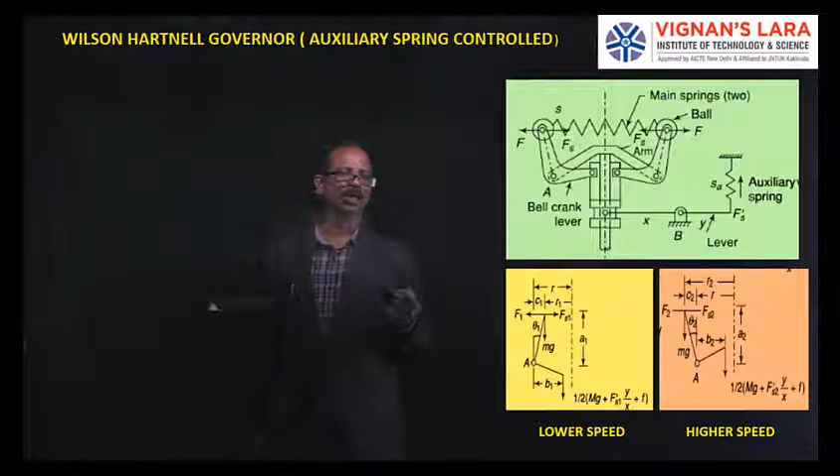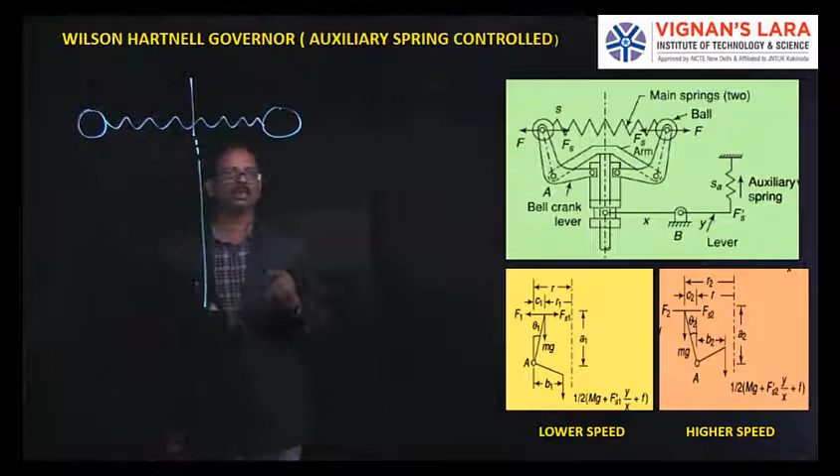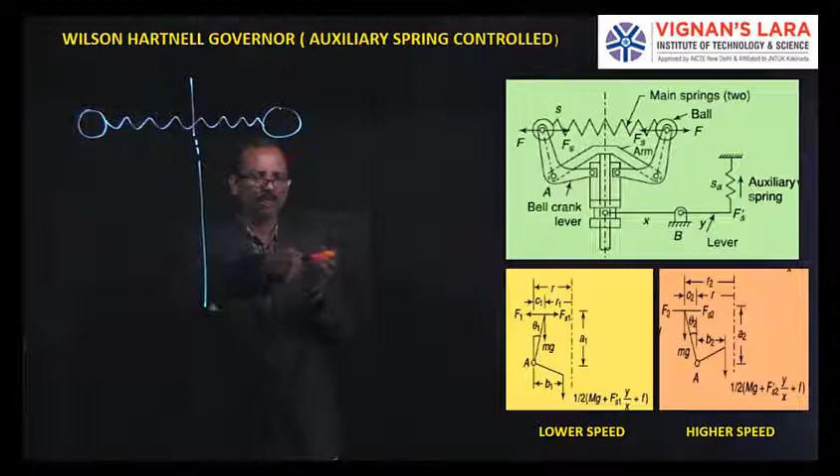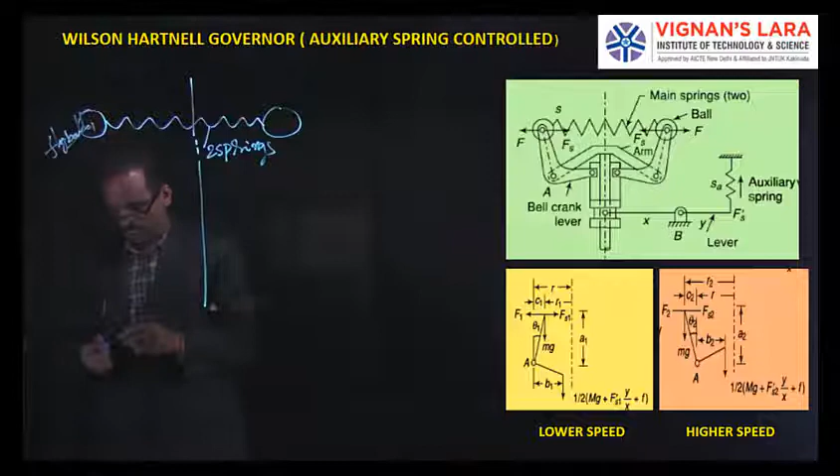I'll draw a simple line diagram, though the complete diagram is already available. The fly balls, fly ball 1 and fly ball 2, are placed such that they are connected by two springs, meaning they are kept parallel. You can imagine spring 1 and spring 2 connected at this end and this end. These are the two springs, placed here. This is fly ball 1 and this is fly ball 2.

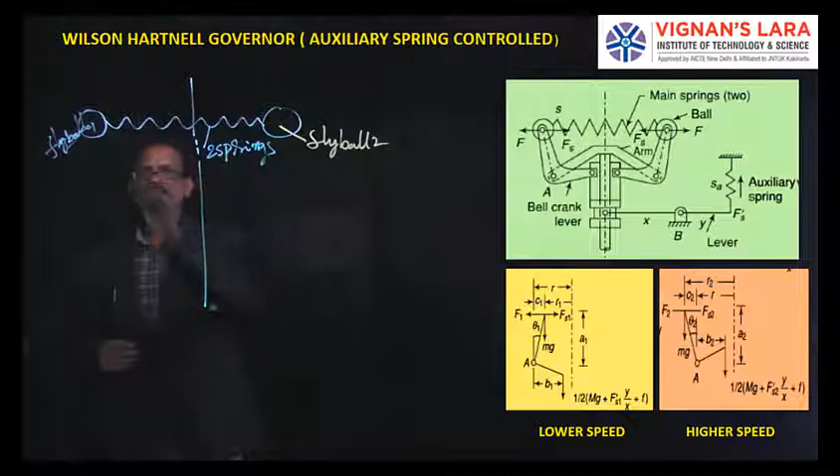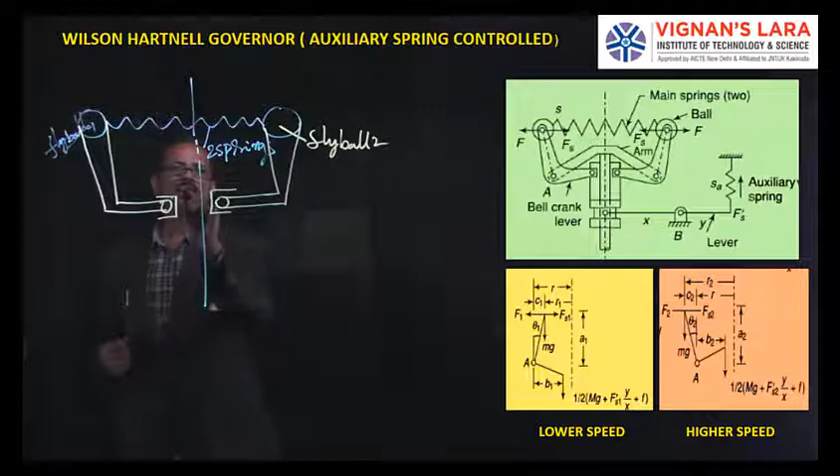These fly balls are connected to bell crank levers as usual, with horizontal and vertical arms. The bell crank levers are connected like this, and of course there's your sleeve and a main spindle. These bell crank levers are pivoted at points A and B, and the entire sleeve is connected like this. This is a simple line diagram.

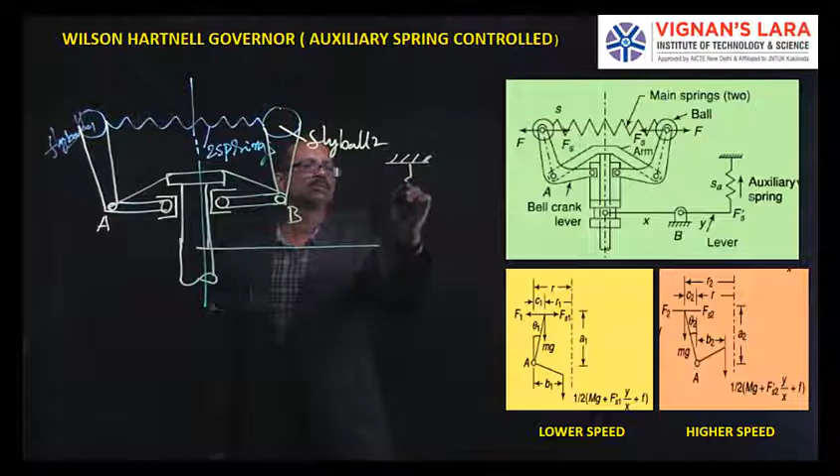In addition to this, you can observe one more spring connected, called the auxiliary spring. We keep a fulcrum point at one location, and this is called the auxiliary spring.

Now if you draw the free body diagram, the two extreme positions are shown separately, lower speed and higher speed. Let's see the forces we get here. The spring here has a spring stiffness of SA, and the main spring stiffness is S. S is the main spring and SA is the auxiliary spring. We define these distances as X and Y: X from the fulcrum point, and this is Y.

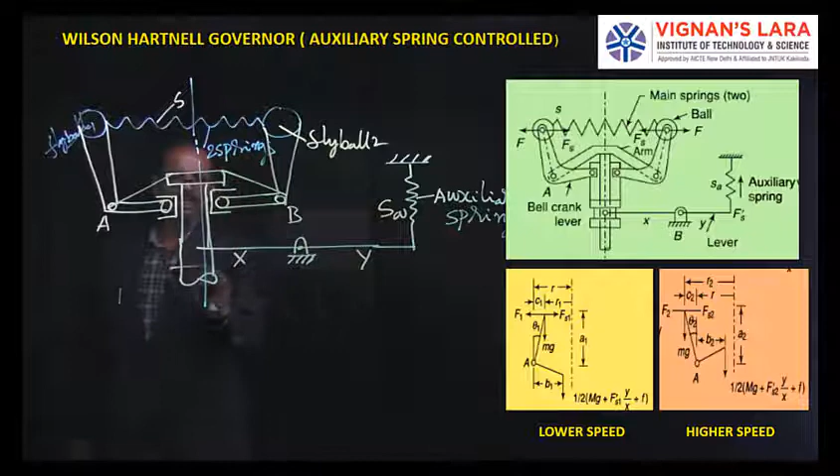When the main spindle speed increases, the fly balls move outward like this, and the fulcrum causes the lift of the sleeve like this. Similarly, if the speed is reduced, it simply pushes back.

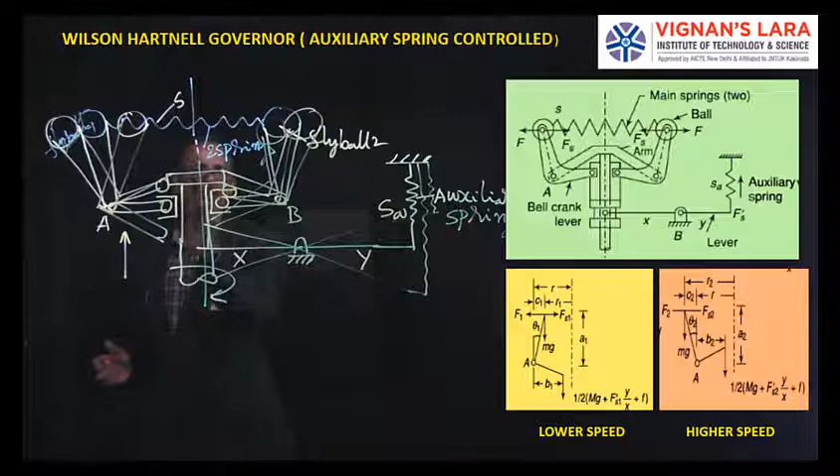This lift causes the auxiliary spring to also lift, moving like this. So the lift of the spindle causes the balls to move outward. When the balls move outward, the entire sleeve moves up. When the sleeve moves up, this causes the auxiliary spring to move downward. This is the high speed state.

In reverse, when it is dropping down, it moves down, so this spring is compressed. This part is the low speed category. So one is the high speed category and another is the low speed category.

We will see the force analysis, how the forces are affecting things, with the diagrams available separately. So this is the main working: there are two springs connected parallel, one behind the other, these are the fly balls, and there's a separate auxiliary spring pivoted here, connected to the main spindle through another lever, pivoted at a point here. When the sleeve moves up, the fulcrum point causes the auxiliary spring to move down, and when it moves down, the auxiliary spring is compressed.

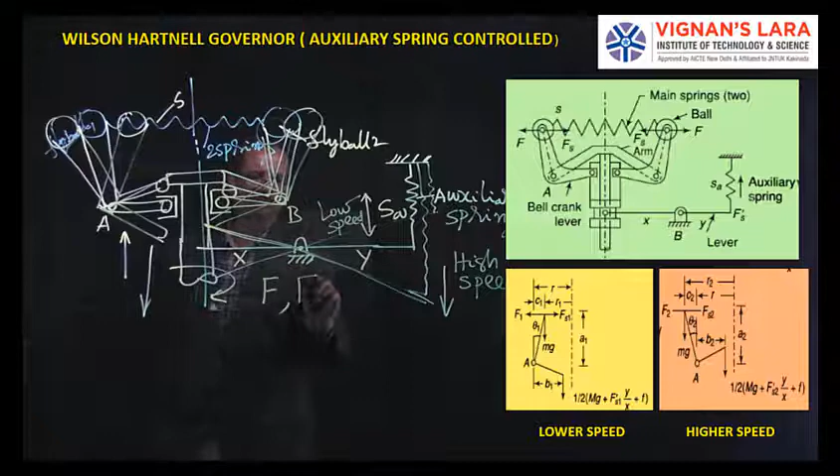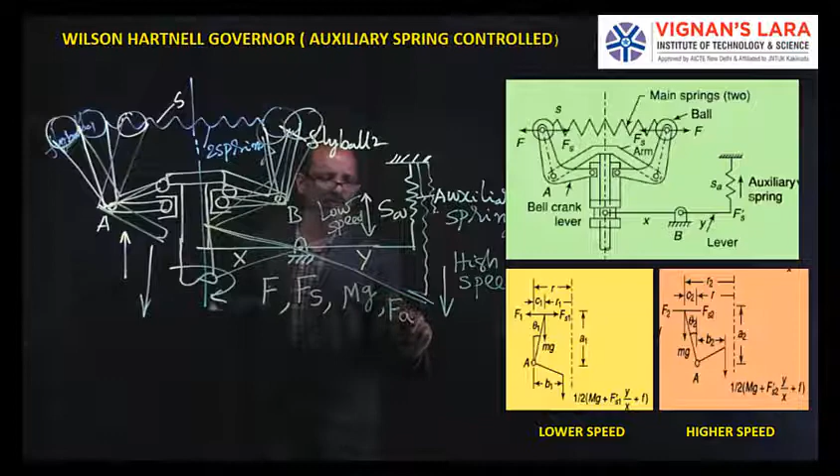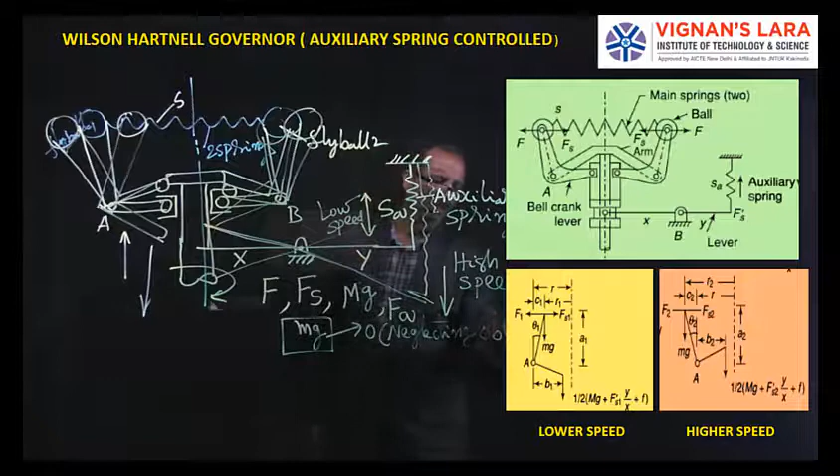If you look at the free body diagrams, what forces do you get? There are four forces: one is centrifugal force F, another is spring force Fs, another is sleeve weight Mg, and another is auxiliary spring force Fa. Even Mg, the self weight of the sleeve, we neglect and take as 0, because we are neglecting the obliquity effect of the arm.

That means neglecting the obliquity effect of the arm. Neglecting obliquity indicates A1 is equal to A2 is equal to A, B1 is equal to B2 is equal to B, and C1 is equal to C2 is equal to 0.

These terminologies are familiar to us from the fundamental basic governors, spring controlled ones, Hartnell governor onwards: A1, A2, B1, B2, C1, C2. So when I consider C1, C2 is equal to 0, automatically this mg component moment becomes 0.

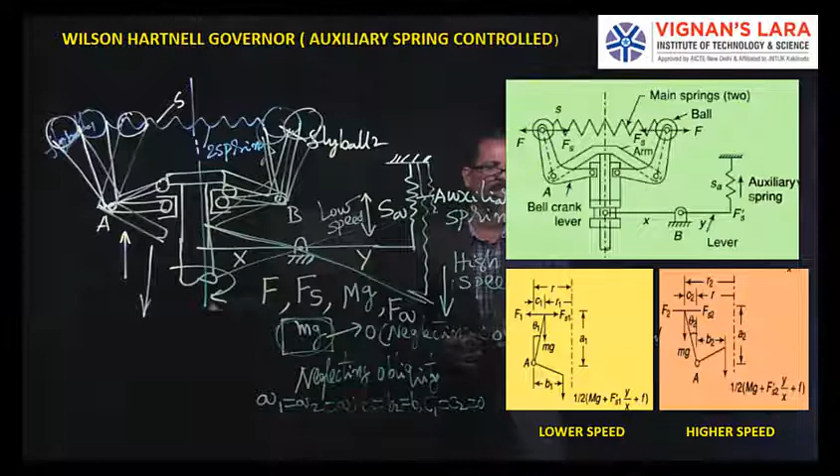So let us see the free body diagram analysis, and with that analysis we will solve a problem on the Wilson-Hartnell type governor.

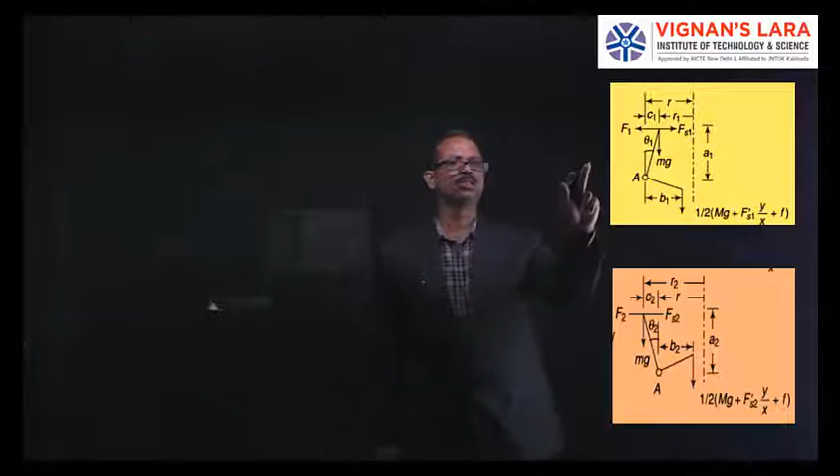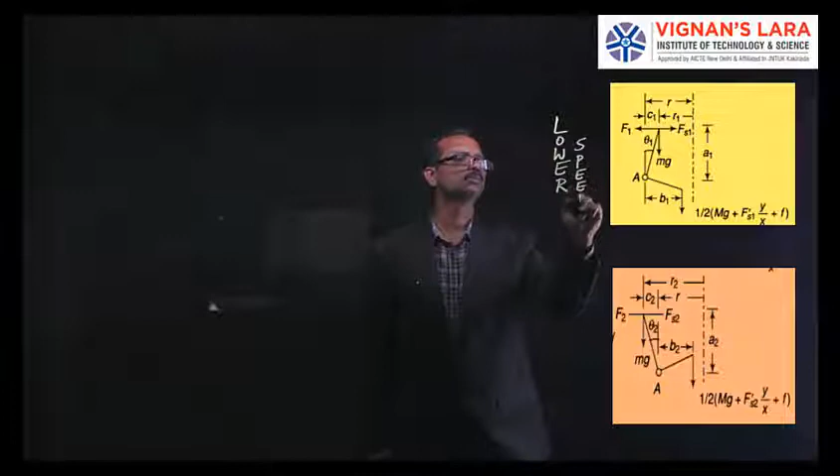On the Wilson-Hartnell type, on the right side I have shown the two positions of the force analysis at lower speed and higher speed. The first one, shown in yellow color, is lower speed, and the second one is higher speed. The various forces that act are shown.

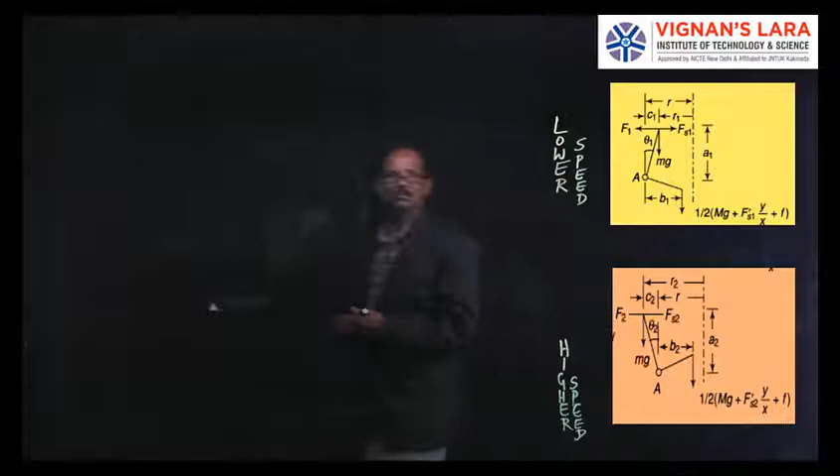I have also shown the entire forces and terminology without neglecting the obliquity effect of the arms. Let us see here C1, C2, A1, A2. So the two speeds corresponding to lower speed and higher speed, and its free body diagrams are available.

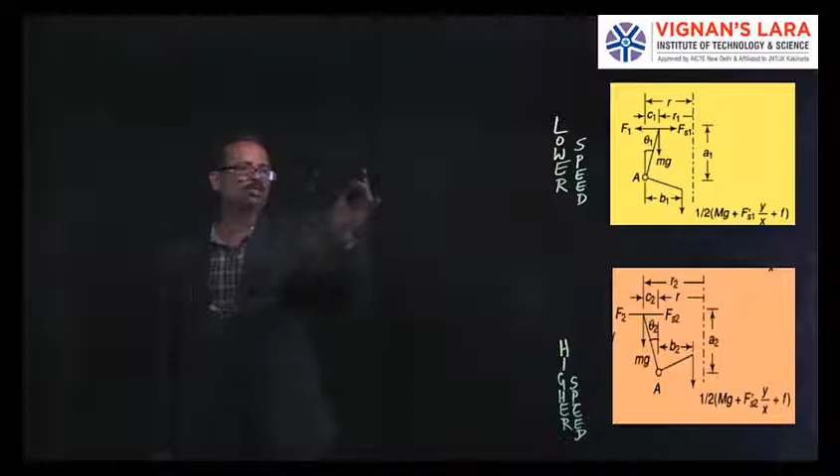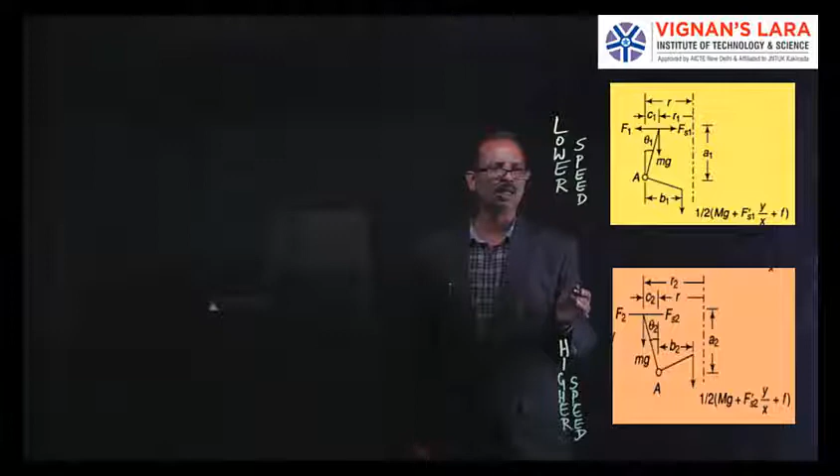The forces are like spring force main and spring force auxiliary. For the first one, lower speed, and the other one, higher speed: main spring force Fs1 and auxiliary one is called Fsa1, like Fs2, Fsa2. So these are the forces coming on the governor.

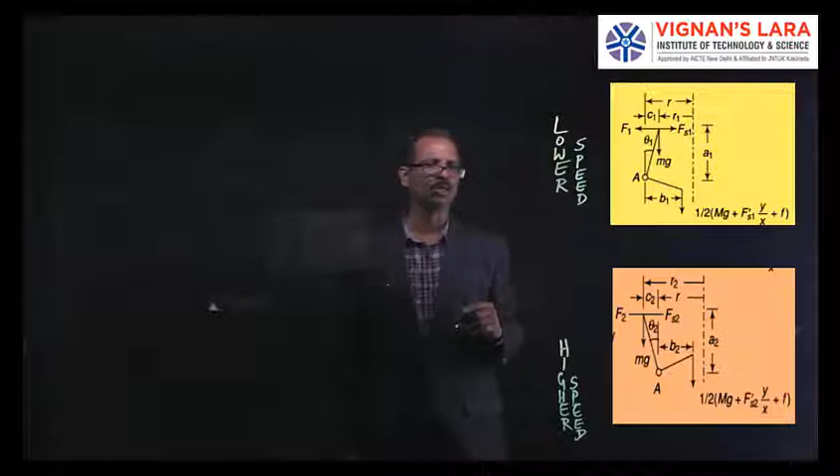Here we have written C1, C2, that is by considering obliquity, but finally I will consider neglecting obliquity, that is C1 is equal to C2 is equal to 0. I have written here the friction component also F, but if I neglect F, I will simply be having four forces.

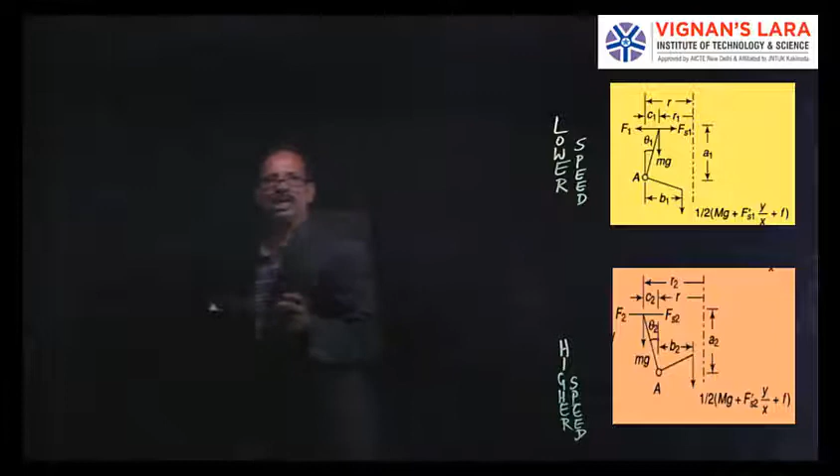The forces I have are F, Fs, Fsa, and Mg. These are the four forces.

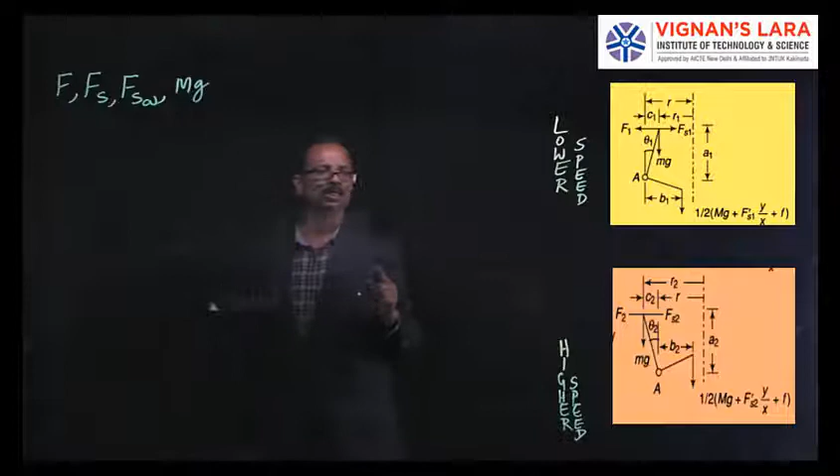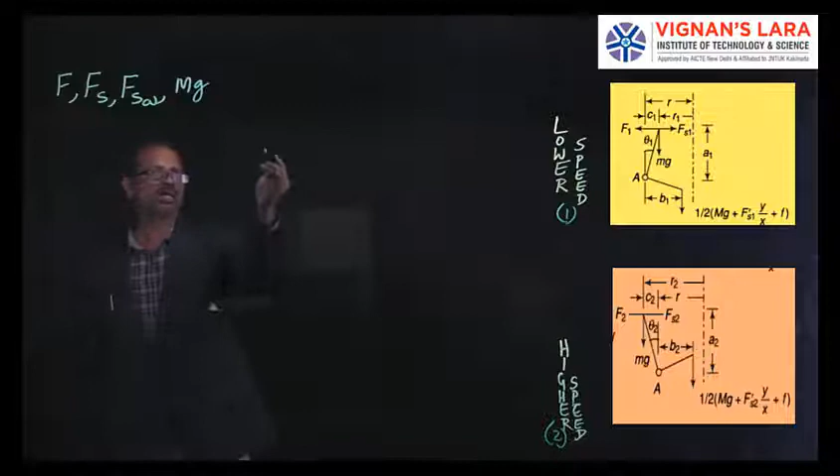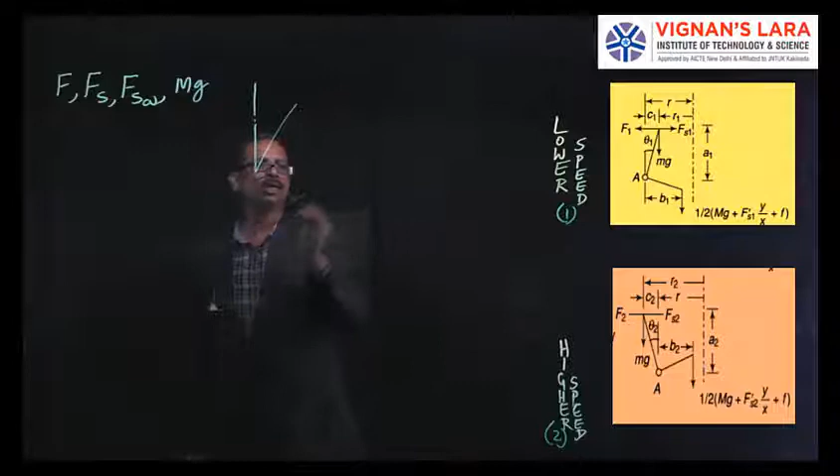If I put 1, it stands for lower speed. If I put 2, it stands for higher speed. So let us first consider at lower speed. What is the lower speed, F1? At lower speed, this will be moving inside and this will be moving down.

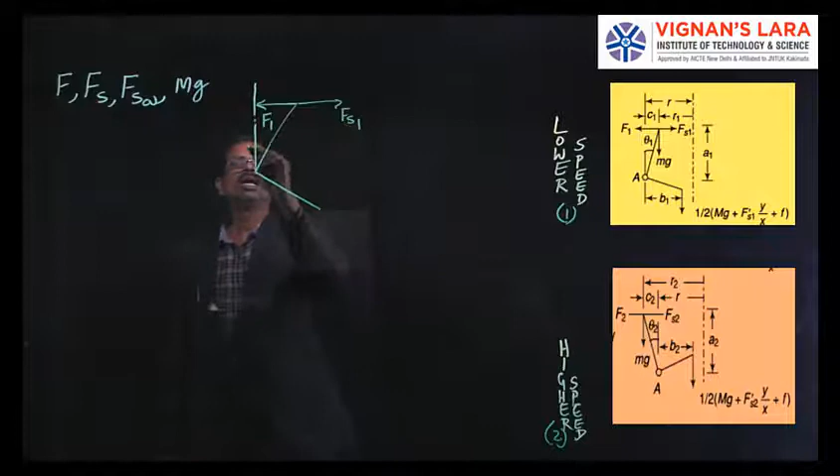So here this is F1, Fs1, and this is A, this is also taken as A, and this is B, this is also taken as B. That is neglecting the obliquity.

And what about here? This is half mg, so half will be shared on the left and half will be shared on the right, that is the self weight. In addition to this, what is the other component you get? That is the auxiliary spring force, the main spring force, and the auxiliary spring force.

So this spring force will not come as a total component; it will be shared by y by x. What is this y by x? I will tell you. This is the radius of rotation, R1.

So Fsa into y by x is: the spring force, auxiliary spring force, which acts here, this is the spring force auxiliary. As I stated, there is a fulcrum point which we defined, this is x, this is y, and the actual load that is coming on the bell crank lever is here like this.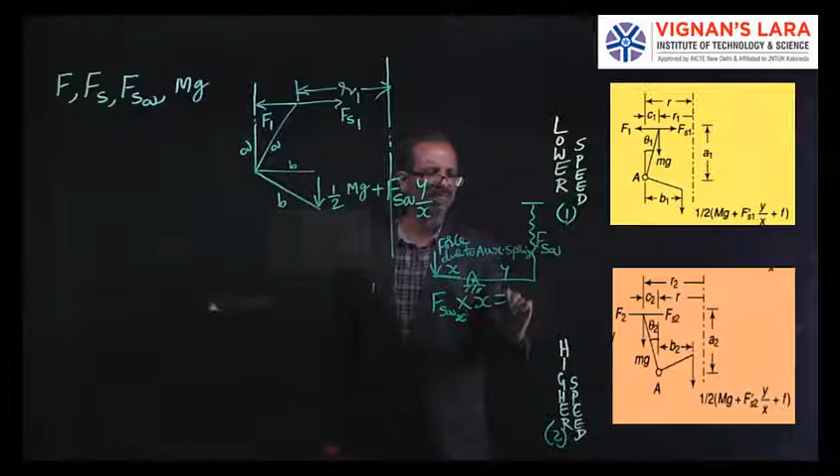At x I will put it like say I can call F suffix sa into x, this is equal to Fsa into y. So I have taken moments here: this force into x is equal to this force into y.

So actual my force is this. This force is nothing but Fsa x is equal to Fsa y by x. That is what it is: half mg plus Fsa into y by x, due to auxiliary spring force component which comes here. Then let me write the moment equations taking moments at this point A. So this is F1.

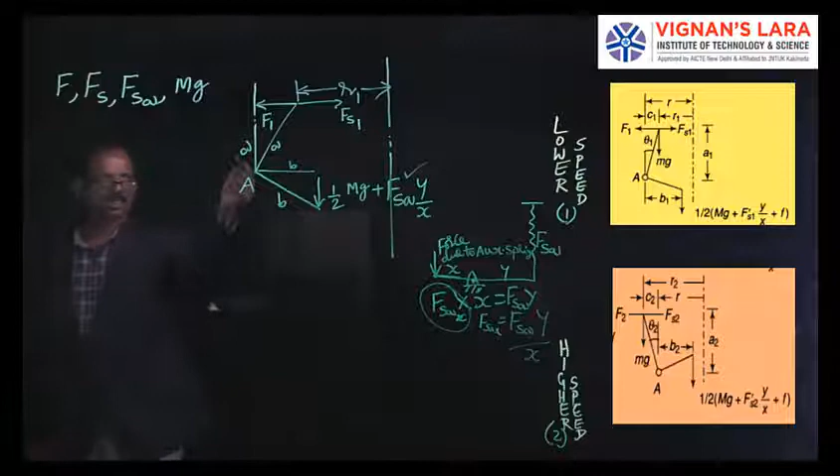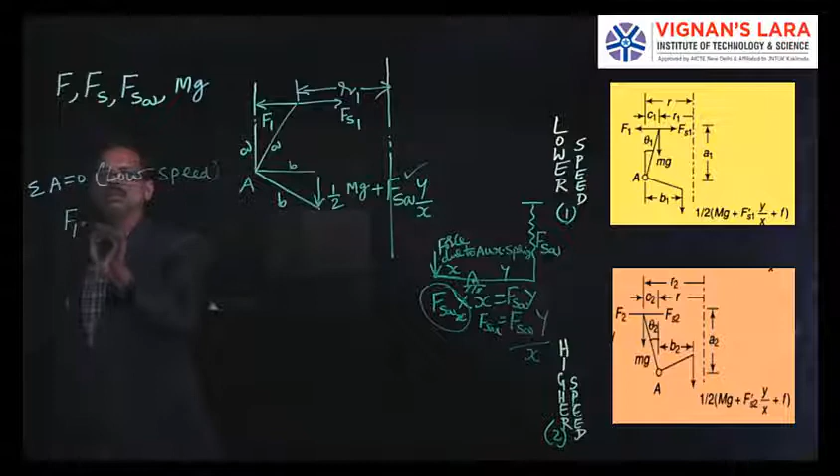I have not taken into consideration the friction force. So half into mg plus Fsa, into y by x, perpendicular distance of B1 is equal to 0. So F1A1 minus Fs1A1 minus half mg Fsa into y by x into B1 is equal to 0.

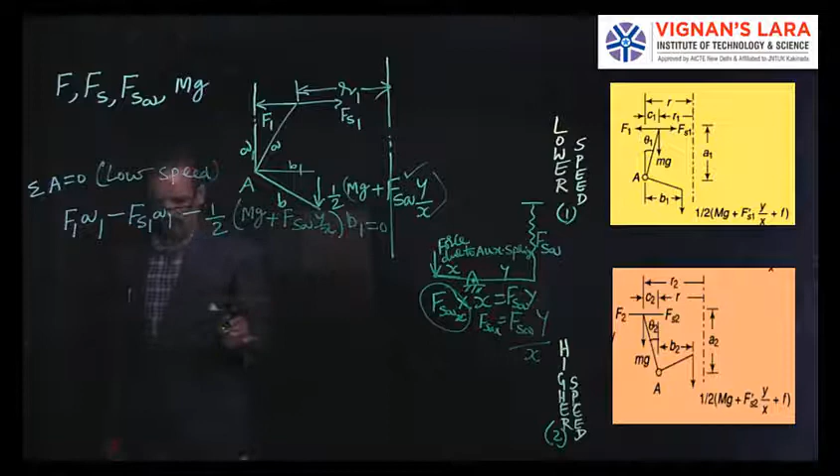So this is auxiliary force at state 1. I can call this SA1. So 1 stands for low speeds, 1 stands for low speeds.

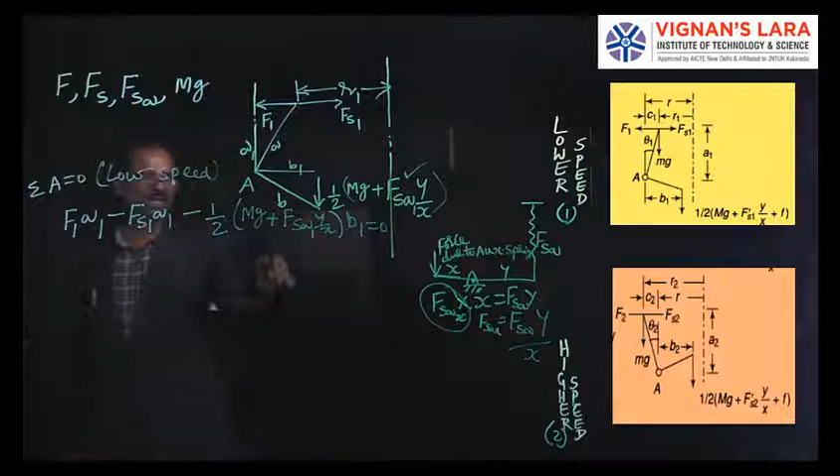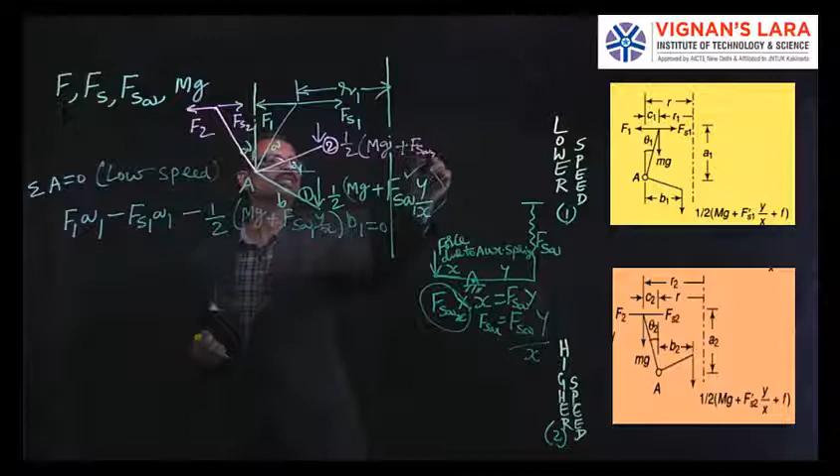Similarly, if I write the other part, that is for condition 2. Condition 2 means like this. This is condition 2 and this is condition 1. So if I write for 2, then it will be F2, then Fs2, then here half into Mg plus FSA2 y by x.

So if I write this equation, F2A2 minus FS2A2 minus half Mg FSA2 y by x into B2 is equal to 0. Let me call these equations 1 and 2.

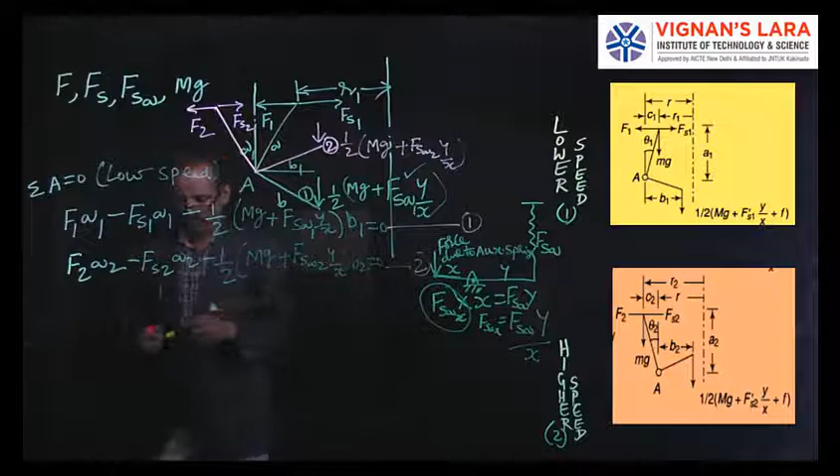So neglect obliquity of arms. If you neglect obliquity of the arms, A1 is equal to A2 is equal to A, B1 is equal to B2 is equal to B.

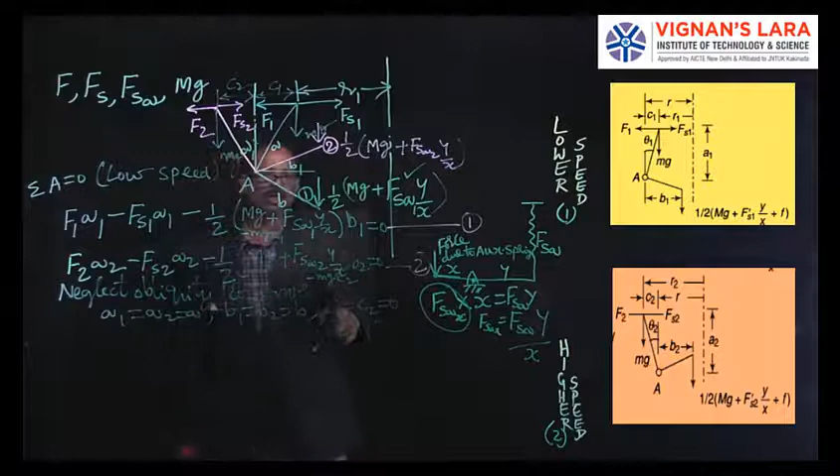Of course, C1 is equal to C2 is equal to 0. So actually, if I want to write the mg component, that I have already neglected, I can consider here, this is mg, C2, C1. So that means I will consider that component also here, minus mg C1 and here minus mg C2. Anyhow C1 and C2 are 0, these components will become automatically 0.

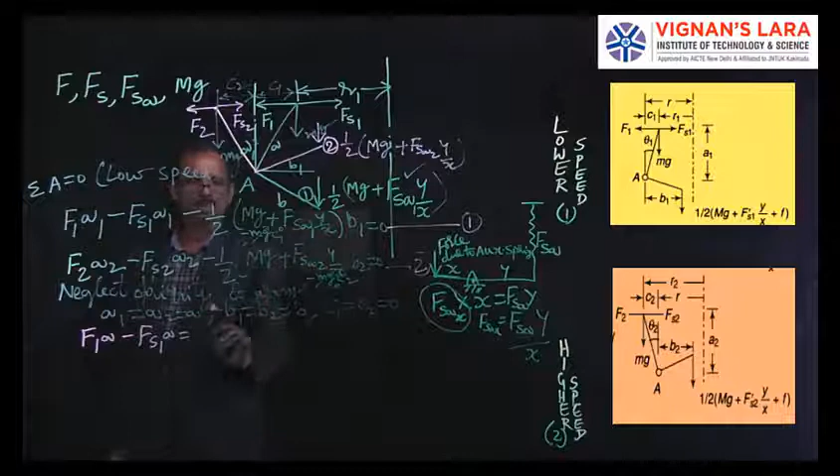So A1 is equal to A2 is equal to A, B1 is equal to B2 is equal to B, C1 is equal to C2 is equal to 0. So if I apply those things, I will get these values like F1A minus FS1A is equal to, I will take that side, then this is half mg plus FSA1 y by x into B,

equation number 3. Similarly, F2A minus FS2A is equal to half mg plus this. So equation number 3 and 4 will be written like this.

So if you take A common, this is simply nothing but F1 minus FS1 into A is equal to half mg plus FSA1 y by x into B.

Then this is F2 minus Fs2 into A is equal to half mg plus this. So I got the equations in a simplified form, like F1 minus Fs1 into A, half mg FSA1 y by x, like F2 minus Fs2A is equal to half mg FSA2 into y by x into B.

So that is the 7th equation.

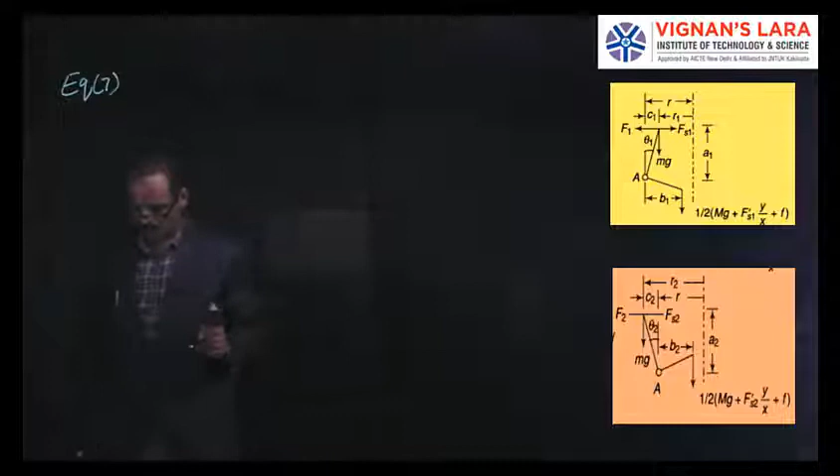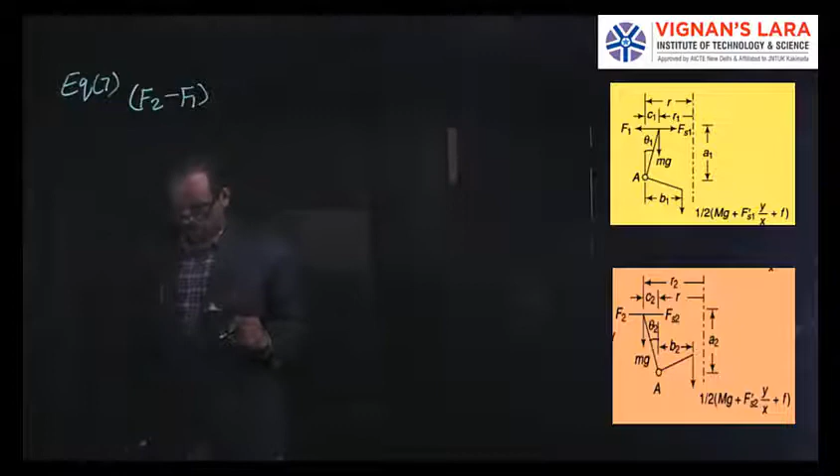So just now we have written equation 7, which is nothing but F2 minus F1 into A minus Fs2 minus Fs1 into A is equal to FSA2 minus FSA1 into BY by 2x. So this is the equation which we have used. This is equation number 7, which we have just derived.

So this equation, the 7th equation, is the basic equation, and for this, what is F2 minus F1 component, Fs2 minus Fs1 component, FSA2 minus FSA1 component, those things we will write separately.

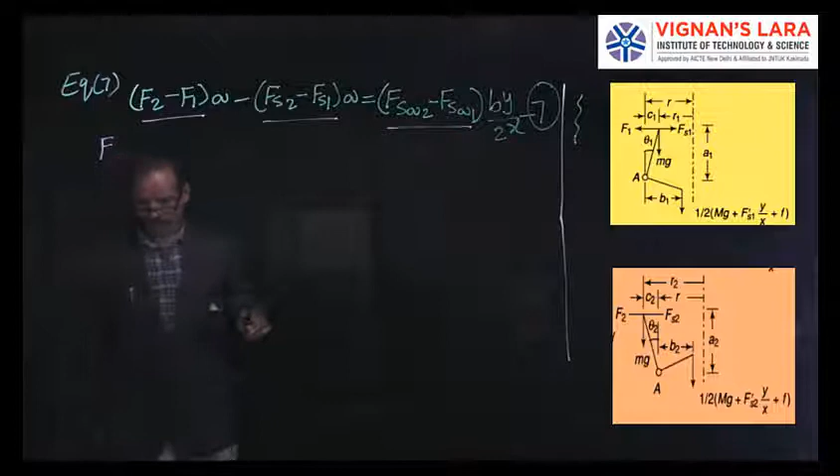See, what is Fs2 minus Fs1? This is nothing but the change of spring force, change of main spring force. How do we get this Fs2 minus Fs1? That is the spring stiffness multiplied by how much the spring is elongated.

How many springs are there? I said there are 2 main springs which are connected in parallel. So 2 springs, and its stiffness is S. And how much amount it is expanding, that is the difference of the radius into 2, like this.

So what is this? Stiffness, effective stiffness. 2 springs are there, connected in parallel. When they are connected parallel, the total stiffness is 2 times S into how much it elongates, R2 minus R1 into 2. So that becomes 4S, R2 minus R1. So we can write Fs2 minus Fs1 like this.

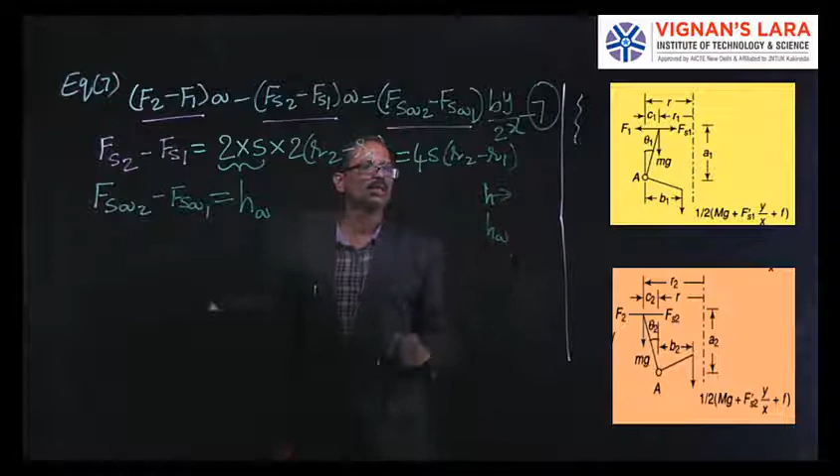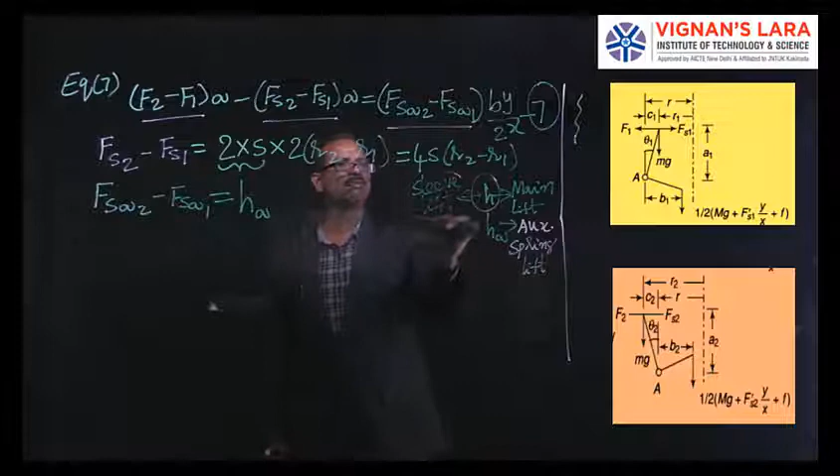HA. H is the main lift or sleeve lift. And HA is the auxiliary spring lift or movement.

So here we are writing the difference of auxiliary spring forces change. That's why the auxiliary spring lift is HA, and its corresponding stiffness is SA. We said main spring stiffness is S, and SA is auxiliary spring stiffness. So HA into SA.

So how can we write this? This can be written as HA into SA is equal to H times Y by X into SA. How do we get this? Let us see.

So you can look at this. We have the auxiliary spring. The auxiliary spring movement is HA, and the main lift is H. Here this is the fulcrum point. This is HA, the auxiliary spring, causing a movement of HA.

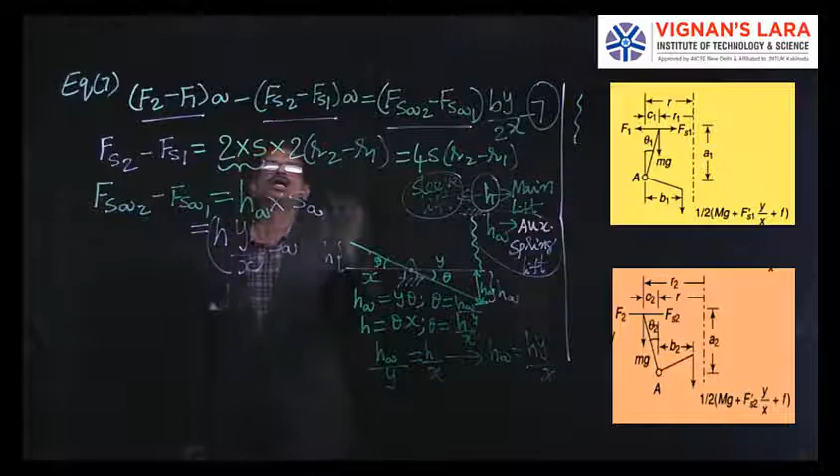So I got FSA2 minus FSA1, and I got the other one, FS2 minus FS1. Let me substitute these values in equation number 7, that is A times F2 minus F1, taking this on the right hand side. This becomes plus, then Fs2 minus Fs1. This is equation number 8, and this is equation number 9.

So substitute equations 8 and 9 values in equation 7. So A into F2 minus F1 is equal to 4 into S into R2 minus R1.

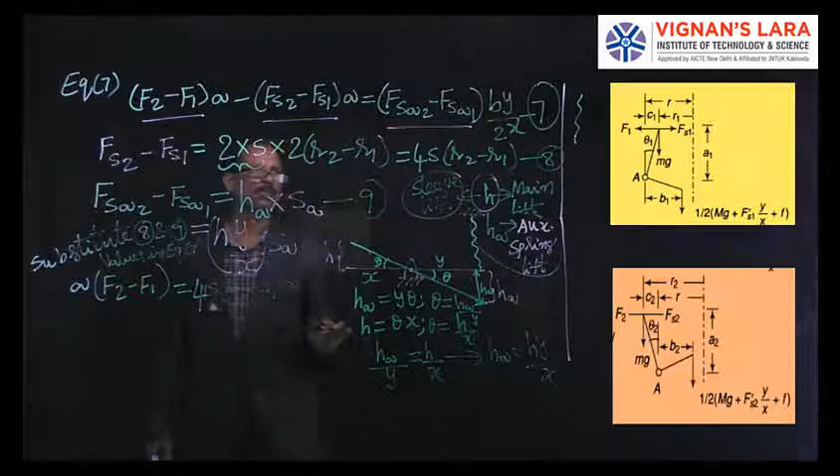Already A is there, A, plus FSA2 minus FSA1, that is HY by X into SA, this into BY by 2X. So let me write this equation as equation number 10.

This is equation number 10. This is substituting simply equation 8 and 9 into the 7th equation. I got this one. So I will replace the other part. I have HY by X into SA, so YB, this is BY by 2X.

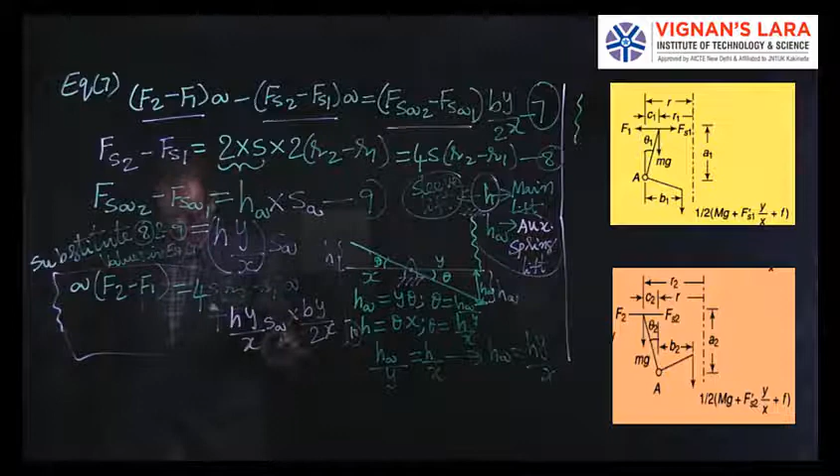So divide the entire equation by R2 minus R1. Divide the entire equation by R2 minus R1 by A.

Divide the entire equation by R2 minus R1. So here this is A into F2 minus F1 by R2 minus R1, equal to 4S. R2 minus R1 by R2 minus R1 will get cancelled. A plus HY by X into R2 minus R1, into SA into BY by 2X.

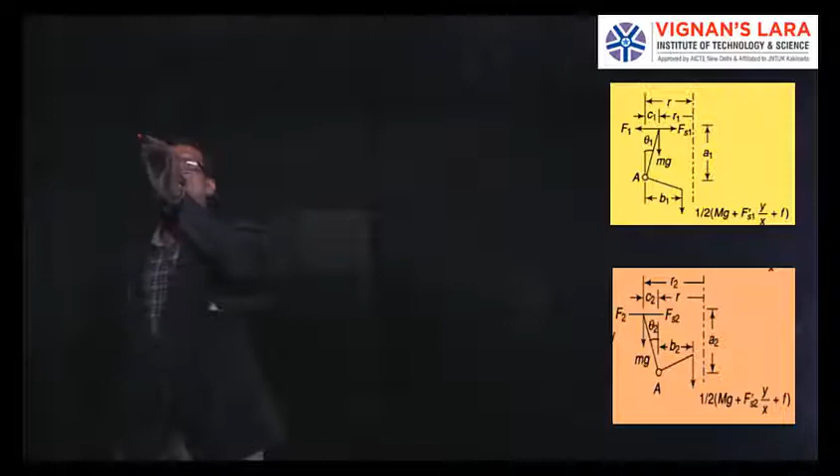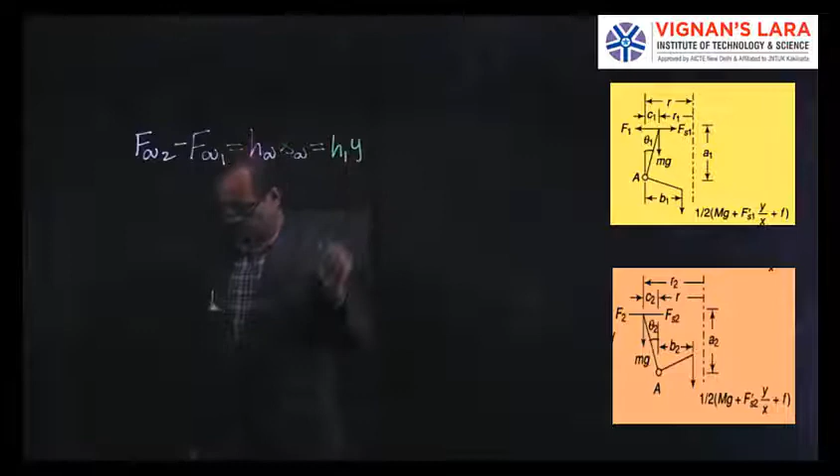So we can write the final equation like FA2 minus FA1 is equal to HA into SA, is equal to H1Y by X into SA, which is also equated to R2 minus R1 into B by A into Y by X into SA.

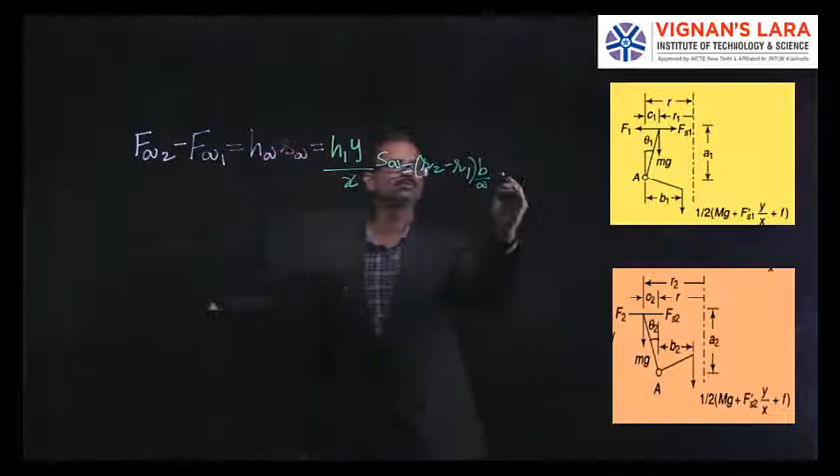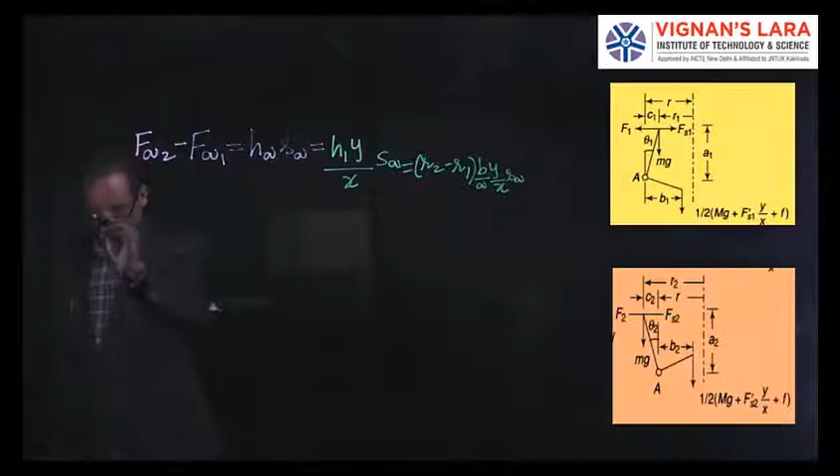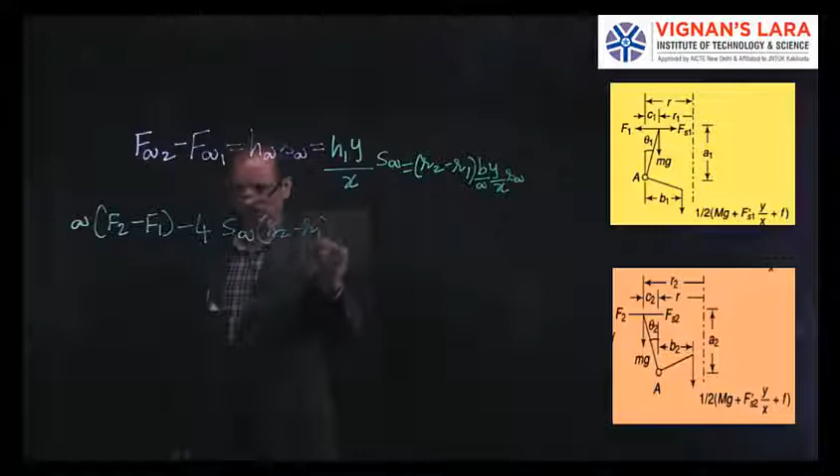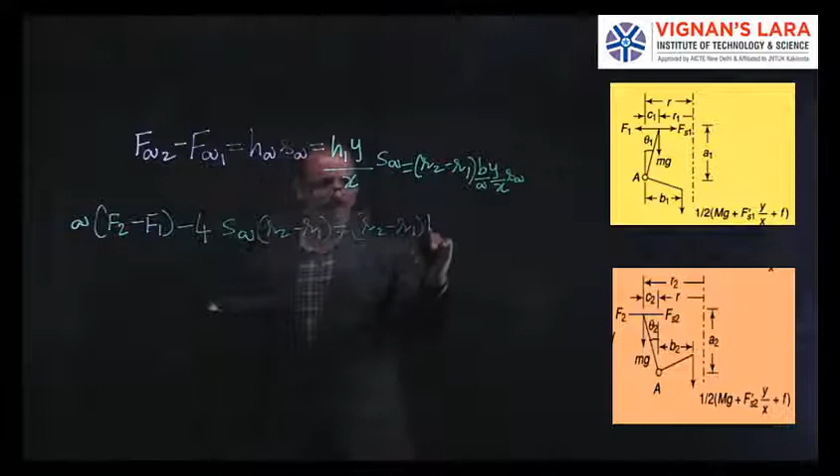Okay, so by rearranging these terms, we get A into F2 minus F1 minus 4SA into R2 minus R1 is equal to R2 minus R1 into B square Y square by 2AX square into SA.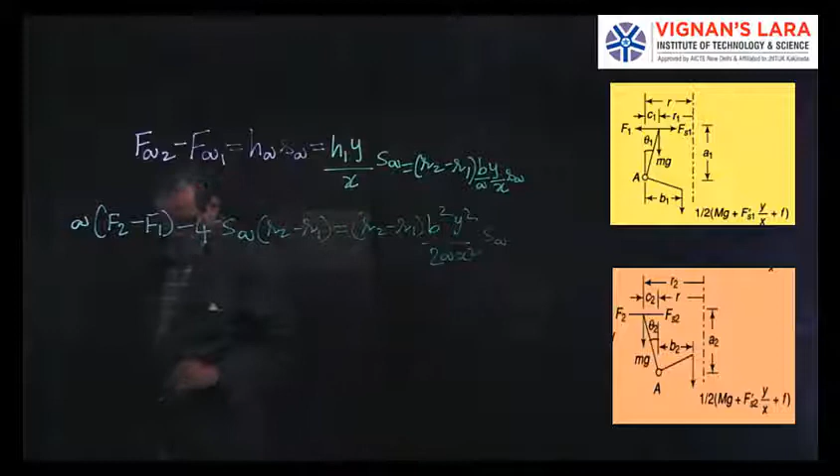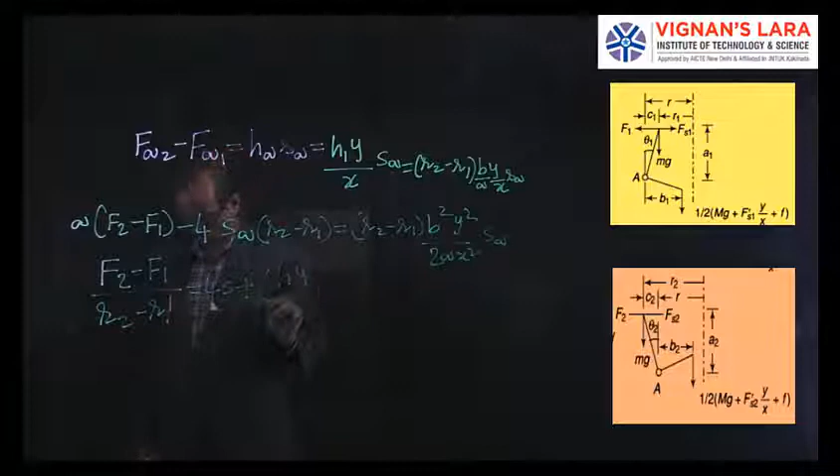So F2 minus F1 by R2 minus R1 is equal to 4S plus by AX whole square into SA by 2.

So F2 minus F1 by R2 minus R1 is equal to 4S plus BY by AX square into SA by 2. So this is the equation which we use to solve the problems. So F2 minus F1 by R2 minus R1 is equal to 4S plus BY by AX whole square into SA by 2. So in the next and last lecture, we'll solve a problem on this Wilson-Hartnell governor, and we will explain the characteristics of a governor like stability, isochronism, hunting.

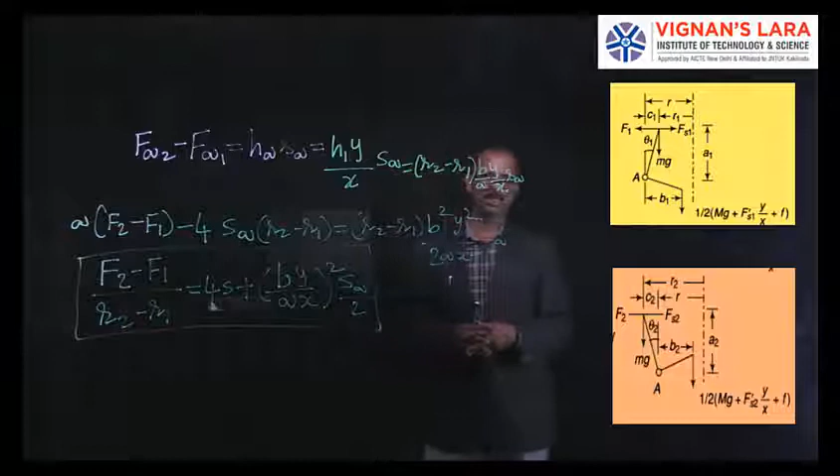Okay, these terms are associated with the performance of a governor. That finishes the 4th chapter.

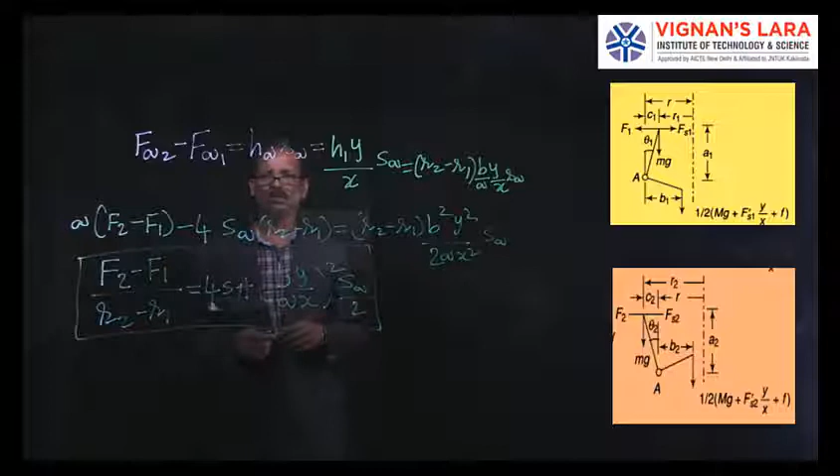Governors is a chapter where you can score good marks in problems as well as analytical, theoretical part questions also. So don't leave this chapter as a choice, because here there are 5 topics in total. 5 topics, 5 into 2 problems, 10, that covers the entire unit. Straightforward problems. If you know the analysis part, your job is only substituting the data into the existing equations. See, this equation, if you remember, then the next class problem we are going to solve is simply substituting in this equation by writing F2, F1 values, the centrifugal forces, and reading the problem and identifying various parameters like A, B, SA, R2, R1, that will solve the problem very easily.